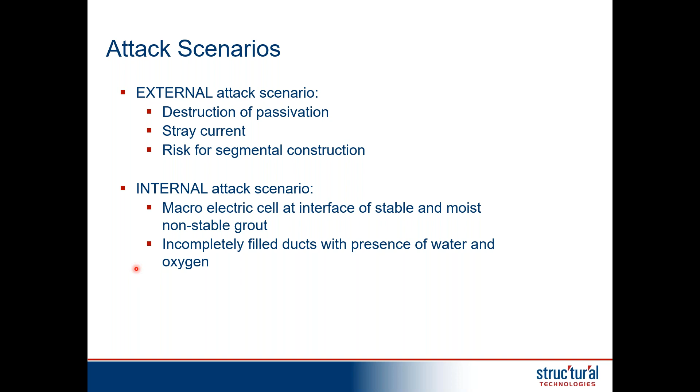We also have incomplete filling of ducts, presence of water, oxygen, voids in tendons. This is something that's really dictated by the quality control in the project of if we can eliminate this or not.

So how do we identify PT corrosion in our existing bridges? So we know post-tensioning bridges has been around for many decades, right? We've had a lot of advancement over the years and we've solved a lot of problems, but we also have a lot of older structures that we need to keep an eye on, right?

And even newer structures, sometimes we have issues with if there's quality control problems. But how do we identify the PT corrosion? Well, it's usually a reactive measure.

It generally requires some means of destructive testing to really look inside the tendon and see what's happening. So more often than not, we're being reactive to it.

We may see cracks in concrete, we might see a failure of external tendons, and that's when we know that there are problems with corrosion or something going on with our bridge. And at that point, there's already serious damage that's occurred.

While we do have preemptive measures to identify it, it usually requires destructive testing. It can be very expensive because you don't know where you're looking at. You kind of have to just look at everything in the bridge, which can be very costly, time consuming.

And you don't know when it might occur. It might be good 10 years after construction, but at year 15, something happened and you may have to go back and check again. So it only gives you a point in time reference of what's happening on your bridge.

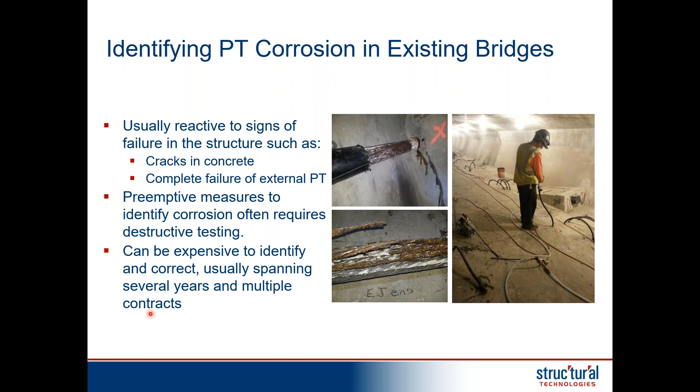So electrically isolated tendons, what is it? So we have a definition of protection level 1, 2, and 3. Just very briefly, we'll go through what each one of these are.

So PL1 is going to be your basic post-tensioning tendon. It has minimal corrosion protection. It's your basic metal duct. You have grout, you have of course all your post-tensioning elements to it. But the encapsulation of that tendon is minimal.

It's suitable for environments that have very low aggressive, very low exposure, places where you're just not going to expect a lot of corrosion to occur, and they can be suitable for those environments.

PL2 tendons, which is really the main standard that you see across many DOTs today. This has increased corrosion protection using plastic ducts, permanent grout caps, engineered prepackaged grouts; things like that really help keep the moisture outside of the tendon and keep the strands protected.

PL3 is what we're talking about when we say EITs. So PL3 not only has the corrosion protection that PL2 does, but it has active monitoring and protects it from stray currents. So that active monitoring is really what I would say sets it apart from PL2 and gives it a basis for having a wider application.

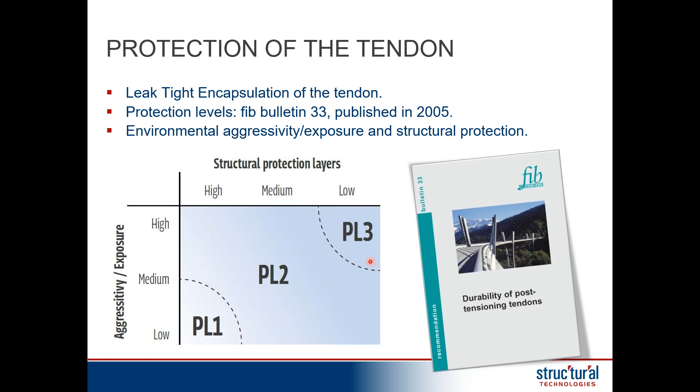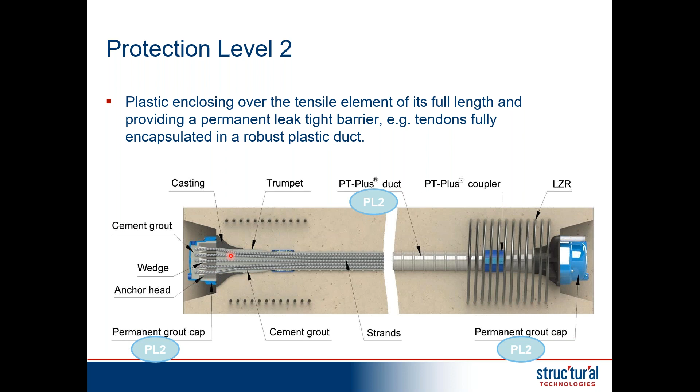It also is required to be monitorable at any time, so that's not just during construction, but that's also going to be throughout the service life of the bridge itself. So the electrical isolation, we're not just concerned about stray currents getting to the tendons, but the isolation proves the water tightness and the prevention of contaminants throughout the lifespan of the tendon.

So if water is able to get inside the tendon, say there's a break in the duct and water is traveling through the concrete through a crack inside the tendon, your tendon will lose electrical isolation very quickly. And that will come up in the monitoring. So it's not just keeping electrical currents out, it's also proving that the tendon is still completely encapsulated.

So a couple of benefits for EIT. The first is, of course, it has the full encapsulation, just like PL2. The stray currents protection is really essential when you have high-speed rail or other high current on your structure. And then the monitoring of the electrical isolation throughout the life of the tendon.

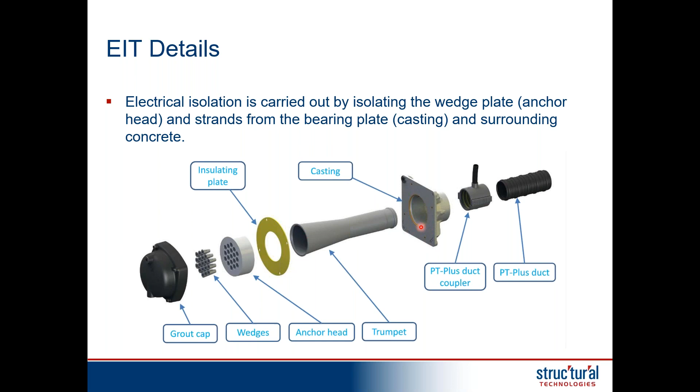So what are we measuring? We're checking for isolation between the tendon itself, the strands inside the tendon, and the rebar cage inside the structure. We know if you ever looked at any kind of rebar cage, everything's tied together, everything's making metal-to-metal contact. So if we can take our measurement between the strands and any part of the rebar cage, we know that there's no metal-to-metal continuity going on anywhere.

We also know that grout and concrete are electrically conductive. They have moisture inside them, especially when they are fresh grout. They're very conductive. So all of these can play a role in how our measurements are taken and what kind of results we're going to expect to see. So we use an LCR meter to check for the resistance between the tendon and the rebar, and we're looking for a very high resistance that indicates that it is well isolated.

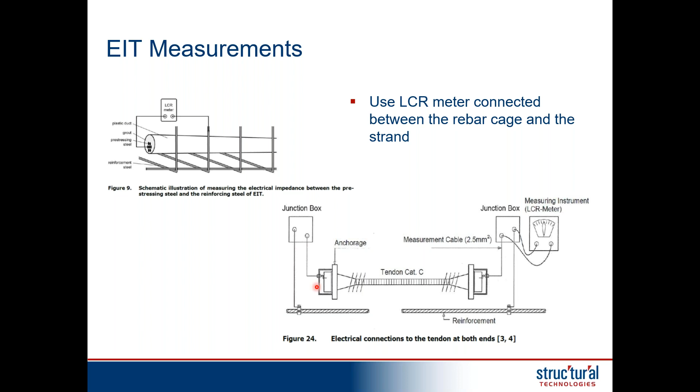So here's two different diagrams showing the measurements and kind of the two different scenarios we might have. It is important to note that we make these measurements at 1 kilohertz in parallel mode. That represents the characteristics of the tendon and allows us to kind of standardize what our results are.

So in the ideal situation, we have the resistance of the grout, we have resistance of the concrete, and we have the duct, which acts as a break in that continuity. So we expect to see a very high resistance because there's no continuity between the grout and the concrete.

If we have some kind of defect in the duct, maybe the duct had a break in it, or there's a kink in the duct, a form tie penetrated the duct, whatever it might be, we've now bridged that gap and we have additional resistance in there, but it's something that we're going to be able to see in our measurements as far as what kind of resistance we see.

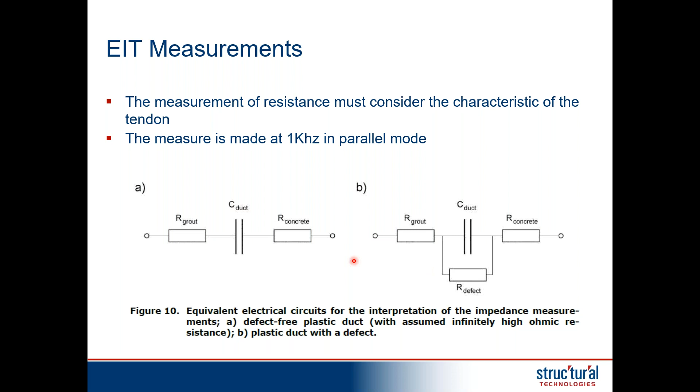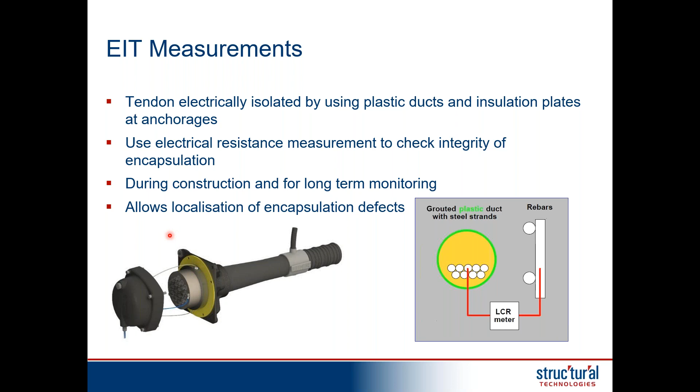So our measurements are, again, checking for isolation between the strands and the rebar. It allows us to locate any defects. We'll get into that in just a second. We're able to measure it not just during construction, but also for the long-term service life of the bridge.

All right, so here's a typical graph of what we would see for our measurements. On the y-axis, we have our resistance in ohms, and x is over time. So immediately after grouting is going to be the lowest resistance that tendon has. The grout is still fresh, it's very wet. Wet grout is highly conductive, so it's going to have very low resistance. But as that grout cures, as it hardens, that resistance is going to increase.

It's eventually going to hit a peak, and we expect it to stay at that level for the rest of its life. Kind of like concrete, it should gradually increase in resistance, but it's more or less going to stay the same. Now, if we're taking measurements, say periodically every year, and we notice that after a couple of years of it being at this nice high resistance, all of a sudden it drops off.

That's an indication that something's happened in the structure. You know, if it's a segmental bridge, maybe it's a joint that's now opened up or cracking that's occurred that's allowed moisture to get in the tendon. But we know that something's happening that's caused the change in this resistance. And we're able to then go into that span that the tendon's in and try and identify what the problem is and address it.

Now, it is important to note that just because it's lost resistance doesn't mean that the tendon has corrosion. It doesn't mean the tendon has failed by any means. It just means it's lost electrical isolation. So if we can catch this early and not wait 5-10 years for the corrosion to set in, we can address the issue before it becomes a problem, right? So there's a lot of benefit to being able to monitor these and being able to address them.

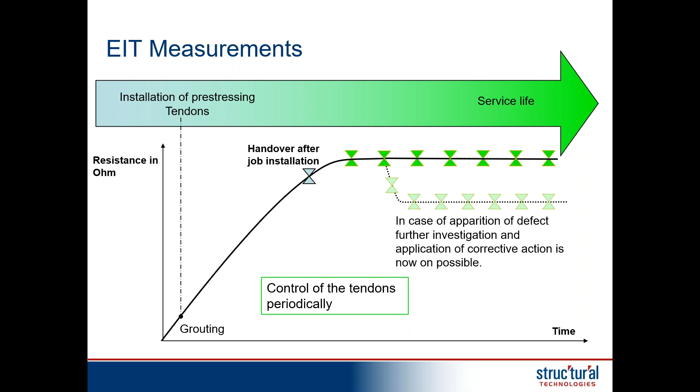So during construction, we have a couple of control points that we want to check during the installation of these tendons. The first one is checking for isolation between inside the ducts and the rebar. We can do this with a pre-pour air test, right? If we can make our duct connections airtight, then they should be grout tight and eliminate any kind of intrusion that way. We want to check for isolation after we install the strands during the threading, and we also want to check it after the tensioning.

The reason we do this is if there's some kind of kink in the duct, once you tension it, there's potential for the strand to slightly wear through the plastic, reducing the resistance that it's creating. We also want to check during the grouting and throughout the service life. So the typical expectation that you would see is a very high resistance after tensioning, and then once you grout, that resistance would actually lower temporarily and then steadily increase back to where it was.

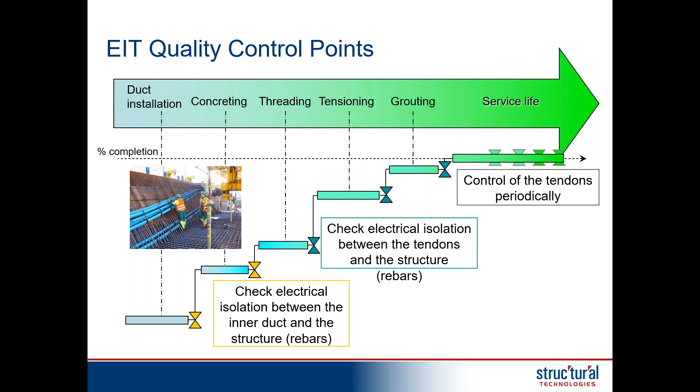So what do we do if we have a leak, or an electrical leak, I should say? The most common places that we're going to find a leak would be in any kind of connection. So anything that penetrates the duct, that could be a grout cap connection, trumpet duct connections, the grout vents. If there's any kind of penetration, say a post-grout inspection, those are all places where we most likely find a leak. If you're talking about segmental construction, you also have segment joints. That'd be a common place to find them.

So this is a non-destructive method for finding a leak. What we can do is apply an AC source to the tendon and to our rebar and create a circuit, right? If we know that there's a leak, then we know that these are connected and it creates a circuit. That circuit's going to give off waves that we can detect from the surface of the concrete. So if we were to take our meter, run it over sector A, we're going to see this signal, right? And then as we cross from sector A to sector B, that signal is going to drop. And that's going to help us pinpoint exactly where that defect is at.

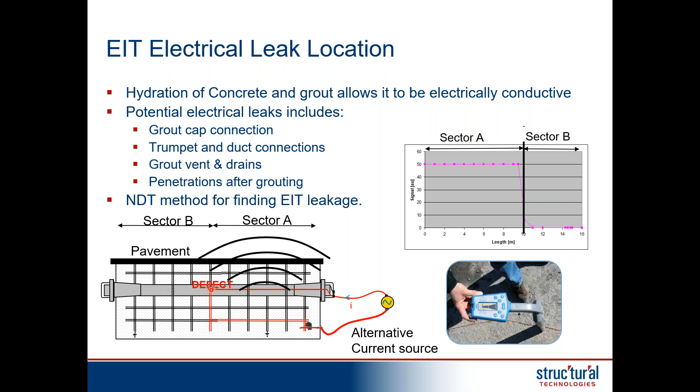So that could be, again, segmental construction. It could be a segment joint and find out, okay, this is the joint that's causing our leak, or maybe it's multiple joints, and go in and do some more thorough investigation. Instead of trying to look at every single joint on a bridge, we can really pinpoint this is the particular span or this is the particular joint that we're having a problem with and seal it up.

So here's a very brief EIT history on it. This is really focusing on the UK, but you can see electrically isolated ground anchors were first used in 1992. So this kind of technology has been around for quite a while. It's been used generally in an as-needed kind of scenario, but it's developed and there's been a lot of improvement since 1992, right? We've had the introduction of plastic ducts, and PTI and FIB7 around the 2000 area. We've had issues of internal PT being banned and then lifted because of problems that they've had with bridges. We've created a standard for EIT tendons all the way back in 2001.

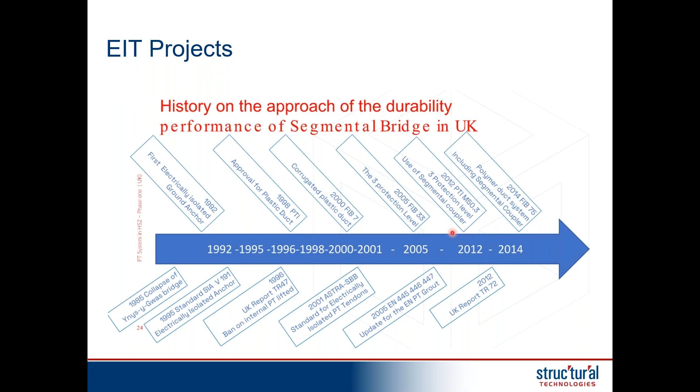PTI and FIB developed the protection levels that we use today, so PL1, 2, and 3. Created definitions for those so we have some kind of standard to measure against. And it's been used on a lot of projects throughout the years. So here's just a very brief sample of some very major bridges. A lot of these are in Europe, Switzerland, but you see United Kingdom, Hong Kong, Czech Republic. So this is a technology that's been around for many years, used in a lot of bridge applications. By no means is this a fresh out of the box, new, untested technology. It's been through the rigors already.

So the second piece of technology we added in here is the void corrosion sensor. So going back to our attack scenarios, we talked about the external attack; the EIT helps us identify and mitigate the external attacks. It helps us know if anything has entered into the tendon or can enter into the tendon. The void corrosion sensor allows us to see what's happening inside the tendon. So these are little probes that go into your grout vent connections. It does allow grout to pass through. This would be an additional connection at the grout vent, but it goes inside the duct with your standard connections.

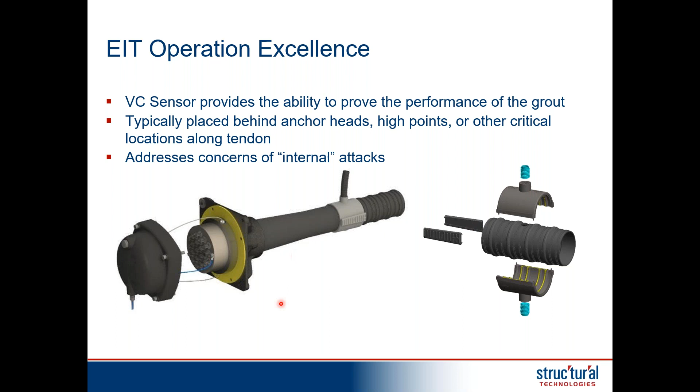It also can be attached at the anchorages and any other place along the tendon that you might want to take a look at. But these are typically put in locations such as high points and trumpets, the most common places for voids to occur. So the void and corrosion sensor has two main objectives. One is detecting voids and the second is detecting corrosion, right?

So we want to check for voids, make sure the duct is completely filled with grout. We know it's supposed to be completely filled with grout, but it's really dependent on your installers, making sure that they are qualified and know how to do the work and the quality control is being implemented. So this gives us a measurement that's impossible to fake. It gives you an actual measurement of is this tendon filled or is it not filled.

It does this by having two different electrodes. So you have an inner wire electrode and then you have an outer ring electrode. And as it fills up with grout, that grout bridges these two electrodes and it creates a path, right? So we're able to then detect if it's full of grout, and we can even detect what is bridging that. Is it water? Is it a watery grout? Is it grout? All those kinds of things can be determined based on what kind of results we see with this VC sensor.

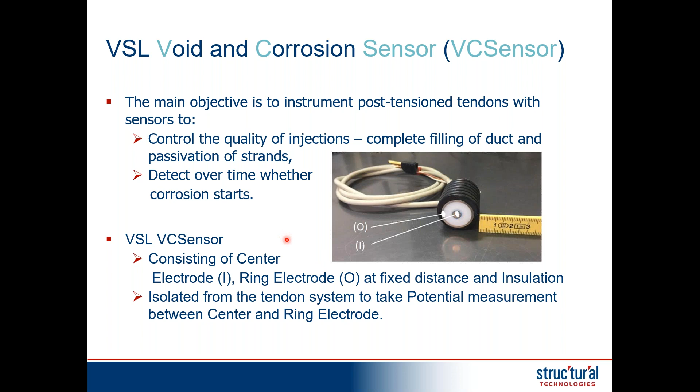So here's a little bit of theory about how it's working. I'm not going to claim to be an expert in it, but I will pass on the information that I understand about it. So we know that there's different areas or different stages of what can cause steel to have corrosion.

The grout creates, I should say a well-mixed, well-designed grout creates a passivity on the steel that will really prevent corrosion. It creates a very strong resistance to it. And that's what the VC sensor is measuring when it's checking for potential for corrosion.

So what it does is during the measurement, it applies a voltage to one of the electrodes and basically cleans off the inner wire by doing so. It then applies a voltage on the opposite electrode, creating a difference in potential voltage between the two. And we're checking for the passivation here.

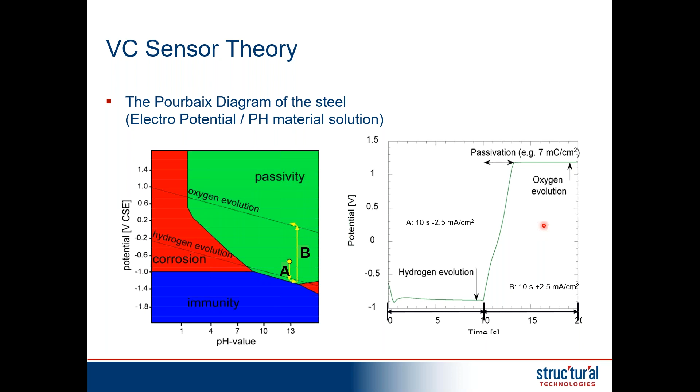We want to see that this line remains level or increases as that test is going on. If it drops, that indicates that the grout is not creating the passivation that we want to see for the steel. It doesn't mean that corrosion is set in or that corrosion is occurring, but it gives us an indication that the grout is not performing like we expect it to, and there could be potential in the future for corrosion to start.

So we have two different measurements. The first one, we call it C3, and we're checking for, is it fully grouted? We expect to see somewhere in the range of 1.5 to 3 volts in magnitude between the two, and that tells us if it is the well-mixed grout that we're looking for. If it's somewhere outside that range, it could mean that it's not the kind of grout we're looking at. But this also needs to be calibrated for the grout you're using. I'll get into that in a little bit.

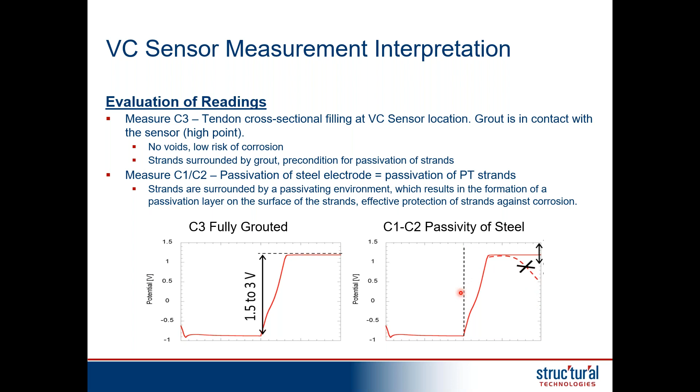The second measurement is C1, C2 passivation of the steel. Like I was saying, we don't want to see it drop off. We want to see it look basically the same as this graph does, or to increase. Once it drops off, that indicates that the grout is not performing very well.

All right, so just to give you a diagram of what these measurements are doing: it's taking a measurement between the inner electrode and the outer electrode. It's doing it for the bottom sensor and the top sensor. At every location, it always needs to have two sensors. The bottom is a reference sensor, while the top is taking the measurement that we really want to look at.

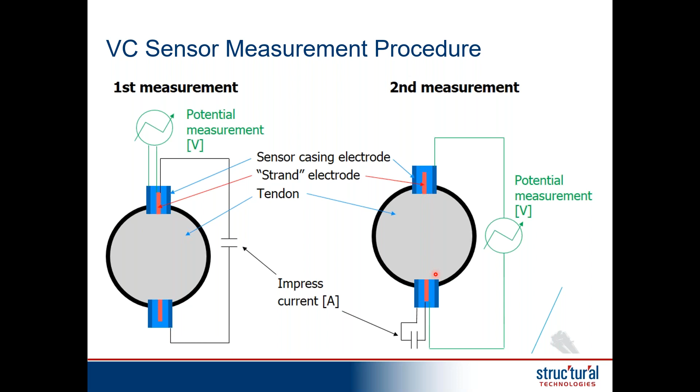And then it's taking a second measurement between the two sensors.

So here's a little matrix of different measurements that we can find and what it means. How do we interpret these? So we're going to define our VC1 as the top, and VC2 as the bottom. And the VC1, we compare the results from VC1 to VC2. So VC2 is our reference, VC1 is what we're measuring.

So if VC1 is similar to VC2, then we know that the grout level is full. We know the grout is of the same consistency of what we expect, and we have a very high degree of confidence that there's no corrosion that's going to occur on these tendons.

If VC1 is lower than VC2, this means that the grout level is full, but the quality of the grout might have too much water in it. It indicates that there's some kind of bleeding happening between the bottom sensor and the top sensor. That bleeding action is causing different results and indicates that there could be a risk of corrosion for this tendon going into the future. Again, it doesn't mean corrosion is occurring, but it means there's a risk for it because the grout's not performing as we expected.

If VC1 is an open circuit, that means there's nothing that bridges the contact between those two electrodes, but VC2 is normal. So you have a normal VC2 reading, but VC1 is open. That means it's partially filled, somewhere in the middle. The VC2 sensor is able to detect it, everything looks good, but VC1 is showing open circuit.

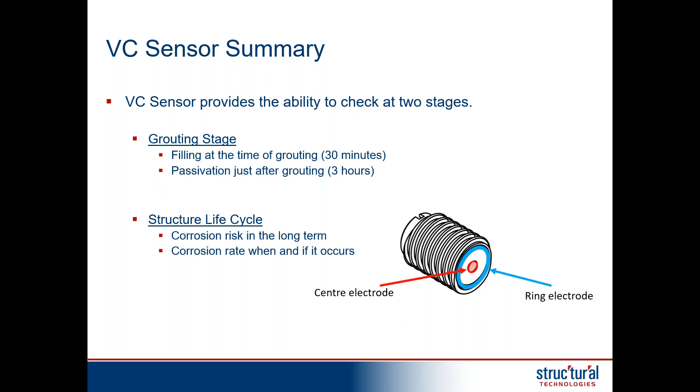All right, so we're going to get into our pilot project here. Overview of the project: this was in Kemah, Texas, just a little bit south of Houston.

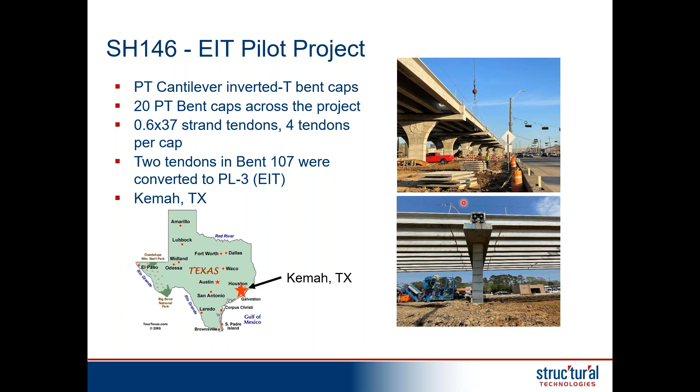As far as the post tension is concerned, it had 20 PT caps across the whole project. They are building basically a bypass in downtown Kemah, so cars can drive right through and not have to go through all these nasty stoplights. Each of these bent caps had 4 tendons, 37 strands each. For the pilot project, 2 of the tendons on bent 107 were converted to PL3. So 2 of these 4 on one side were EITs, and the other 2 were just the normal 37 strand tendons.

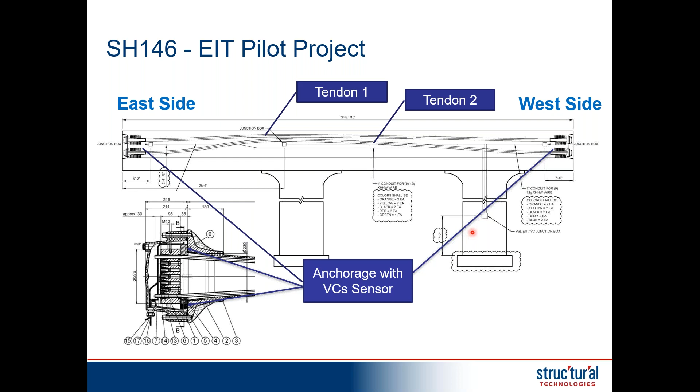So we had the VC sensors at the high points, and this is kind of what the internal schematic of the tubing looks like, with tubing for the wires to come out. Same thing at the anchors.

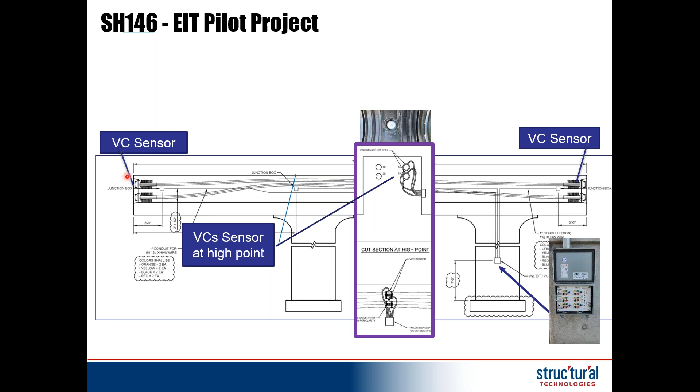The critical hold points we had during the process: we did a pre-pour air test after the duct was installed. This helped us check for any kind of leaks in the duct, any issues that we might want to correct before we pour concrete. We checked prior to installing the strands to make sure there's no contamination inside the duct, no cement paste or anything that could cause electrical leaks. We checked prior to stressing and after stressing, making sure the strand remained isolated between the two. We checked prior to grouting, and we also set up for the vacuum assist grouting.

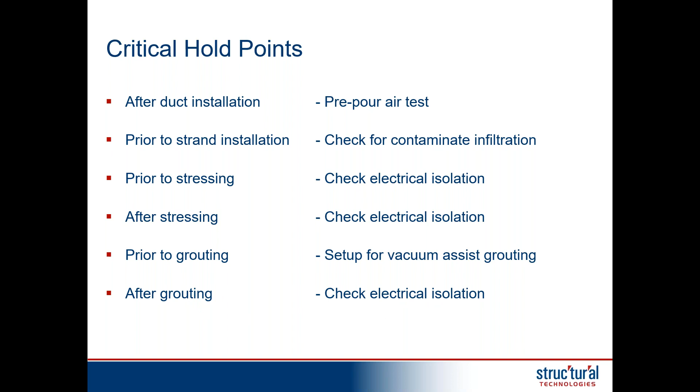This is a little bit different process than your normal air test - we were doing a vacuum test. And then we checked after grouting for the electrical isolation, and that went on for several months.

So how do we mitigate some of our potential leaks? What we did was apply heat shrink over the duct couplers. We used protective shells, which are these ducts, to provide additional separation from the rebar and the duct. We want to make the tendons airtight prior to grouting. By doing that, we were able to eliminate the high point grout vents on tendon number 2 by doing a vacuum assist grouting. And then we used the VC sensors in lieu of a post-grout inspection to verify everything was full. By getting rid of the post-grout inspection, that's one more step of eliminating potential electrical leakage after the fact.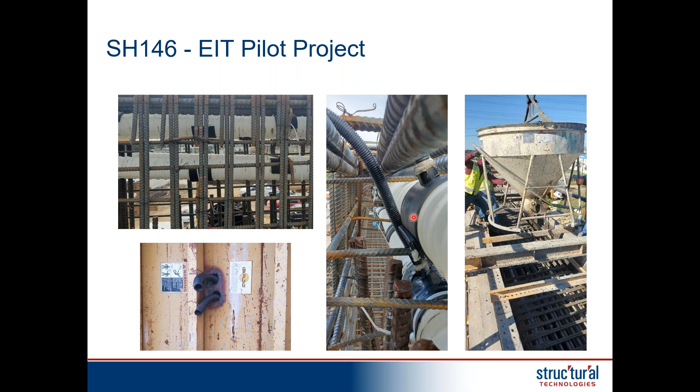So what is really standard in Europe is a requirement to fill the duct up 95%. The reason for that, at least as far as the void sensors are concerned, is these sensors only tell you, is it full or is it not full? It doesn't tell you the level. So if you have a duct that's 98, 99% full and your void sensor is straight vertical, that sensor may not catch it and tell you that you have a problem. But really, is 1 or 2% not full a major problem? More than likely, it's not going to cause a big deal.

So these are located at an angle that corresponds with 95% of fullness. This tells us, is it at least 95% full? And that's a lot more useful than knowing, is it 100% full? So if you're not 95% full, that means you have a pretty significant void that should be taken care of. If you're over 95% full, you could still not be at 100%, but it's probably going to be a very minimal issue going forward. Of course, this could be adjusted to whatever percentage you want to see. So that's what we did here, is measure that out, make sure that line is on our vertical so we know what kind of angle to put these at.

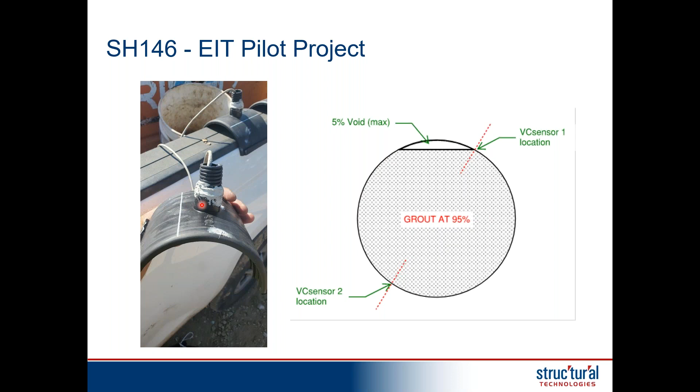Here's some pictures of the isolation plate. We installed this prior to installing the anchor head. This is our void sensor ring, and this held the void sensors. This acted as a distribution plate between the isolation plate and the anchor head, and held the void sensors in place. You can see here that the void sensor is just about 1 millimeter or 2 shy of the surface of the ring. We want to make sure that it does not make contact with the strand and short circuit the process.

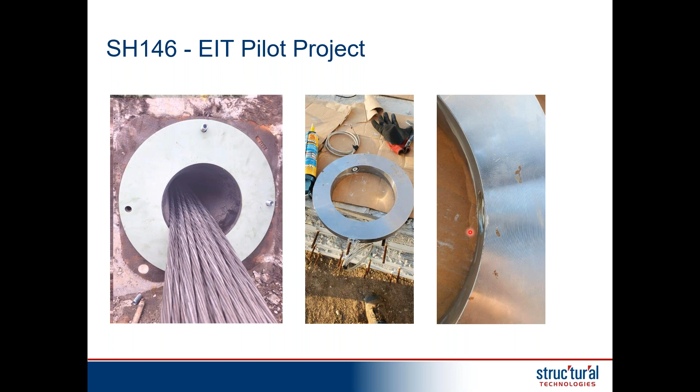Here's a before and after of stressing. You can see everything's in place here during the stressing. The void sensor ring is in between the isolation plate and the anchor head. After we're done stressing, we have a lead wire that was attached to the anchor head, and this is what our measurements were taken off of when we checked for electrical isolation.

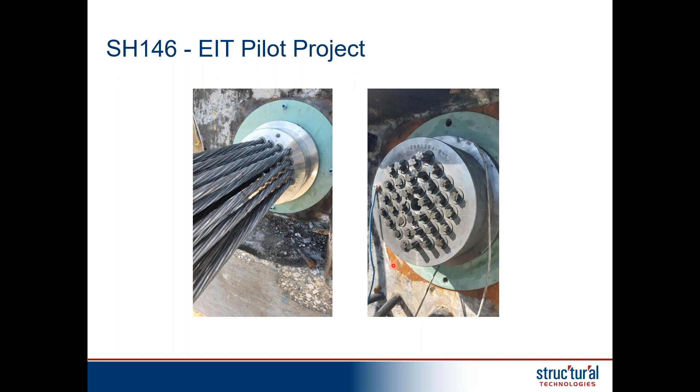So here's us wiring it up. Our junction box, everything is color coded for void sensors and EIT measurements. We have a ground wire all connected in here. You can see the wiring that went back into the concrete and then routed down to this box.

Here's our setup at the ground level. We wanted to make sure we have nice, clean access here, especially with the assortment of measurements we're going to be taking. Of course, with the nature of this being a pilot project, we're going to take a lot more measurements than would typically be required. We want to collect a lot of data during this whole process.

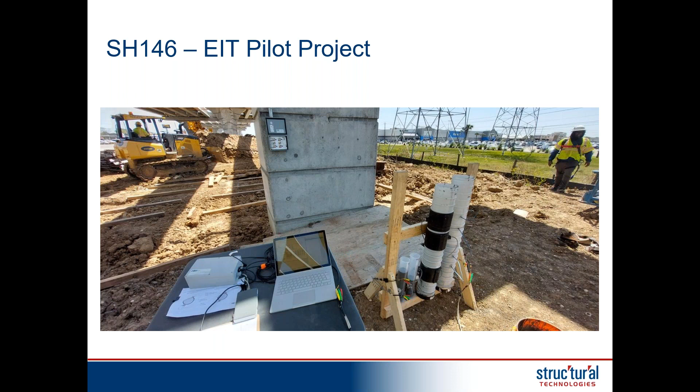So I mentioned before, we've had to calibrate the VC sensors to the grout that we used. These VC sensors have been used, not in the United States, but elsewhere, and they have different standards for grout. So we want to understand how the readings behave with the grout we use here. So we took a couple different samples. We have these graduated cylinders here, some samples of the ducts, couplers. You can see void sensors sticking out on all different sides of it. And we filled up these different specimens with properly mixed grout.

So everything below the blue line is the kind of grout you would want to see inside your tendon. Everything above the blue line is what we call bleeding grout. So we mixed that grout with 50% more water. This would simulate somebody accidentally dumping more water into their grout mix, which is a very plausible thing to happen, and would cause that grout to be poorly mixed. We wanted to see what kind of different readings we get.

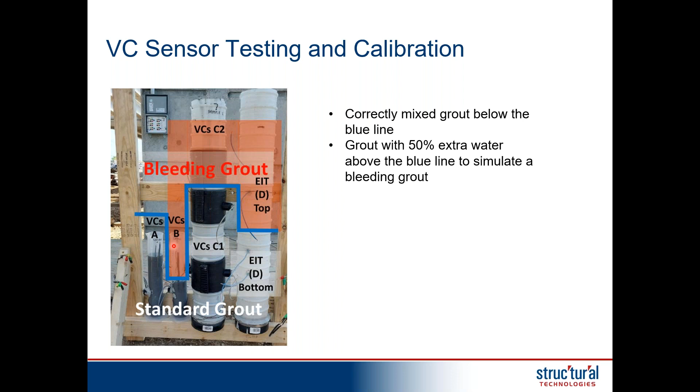So these are the results of the two graduated cylinders. Cylinder A is completely good grout. Cylinder B, we had good grout down here, and very wet grout above. And we're taking measurements between the two.

So the first graph here is at 30 minutes, then we have 3 hours, and then 1 day. What you can see is that graph where it immediately drops off. We do expect this to happen in the first 3 hours. The grout is still very wet, and it's highly conductive, just like salt water is more conductive than fresh water. Grout has so many floating particulates in it that it is highly, highly conductive.

Which is actually interesting, because on the wet grout, it doesn't drop off as much. That's because the concentration of particulates isn't quite as much, so it's not as electrically conductive as the properly mixed grout. But you can see after the grout's set, after a day, how much more passivation this has created compared to the wet grout. The wet grout is still showing a drop, not the kind of curve we want to see, while this one's actually increasing. So you can see the results are very black and white in this case. It's very easy to interpret this as the well-mixed grout versus the poorly mixed grout.

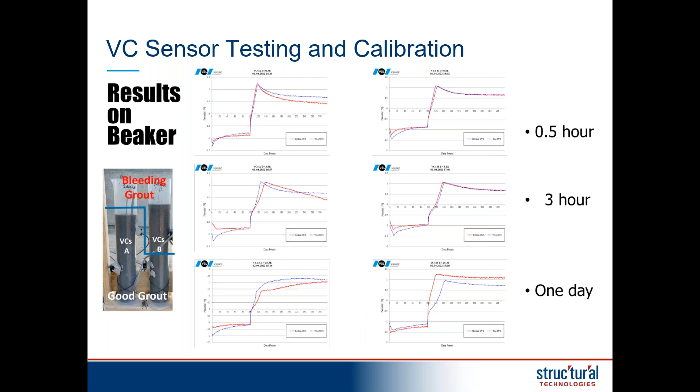Now, we didn't go back through and investigate further where this leakage is occurring. It wasn't really important for the integrity of the structure to understand that. But it gives us an indication of something was going on in there. It could be a very minor leak that changes based on the humidity, the shrinkage of the concrete. All those kind of things could have had a significant impact on that tendon's electrical isolation.

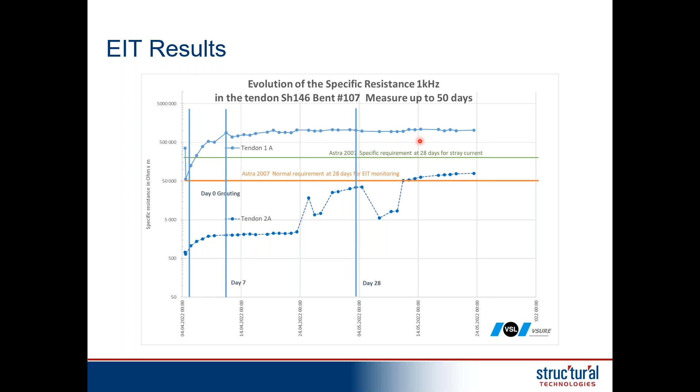But what we do know from these measurements is if we see that this tendon, say in the future, we were to go back and look at it and see that the measurements are kind of sporadic, that may not indicate that there's any new development in the tendon. It was sporadic from the beginning. If we see that tendon 1A drops off in the future, then we would know that something's changed in that structure, something that's created a leak that might warrant further investigation to go and solve.

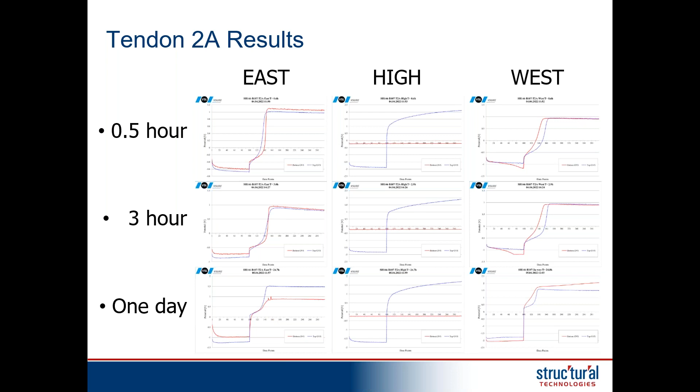And that concludes my presentation. I don't know if there's any questions, or Wade, I guess I'll give it to you now.